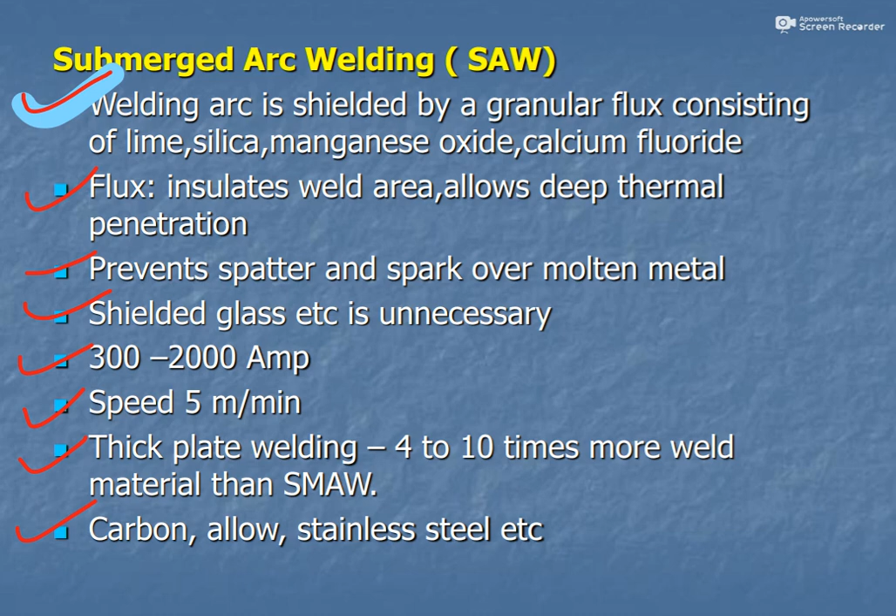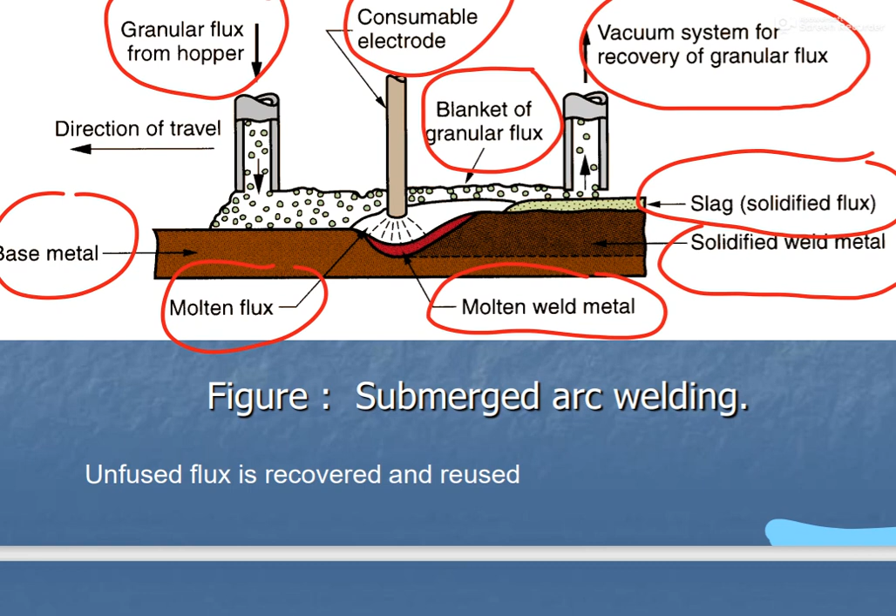Now, what is the construction of submerged arc welding process? First, granular flux coming from the hopper. This is the consumable electrode, blanket of granular flux, and then vacuum system for recovery of granular flux. This is the slag solidified flux, solidified weld metal, molten weld metal, molten flux, and base metal. This is the construction diagram of submerged arc welding process. You can take a snap of this image. Unfused flux is recovered and reused.

Now, what are the important equipments in submerged arc welding process? First is the voltage and current controller. Second is the unfused flux recovery tube. Third is the electrode wire reel. Fourth is the flux hopper. Fifth is the wire feed motor, contact tube, workpiece, weld backing, electrode, cable, ground, voltage pickup leads.

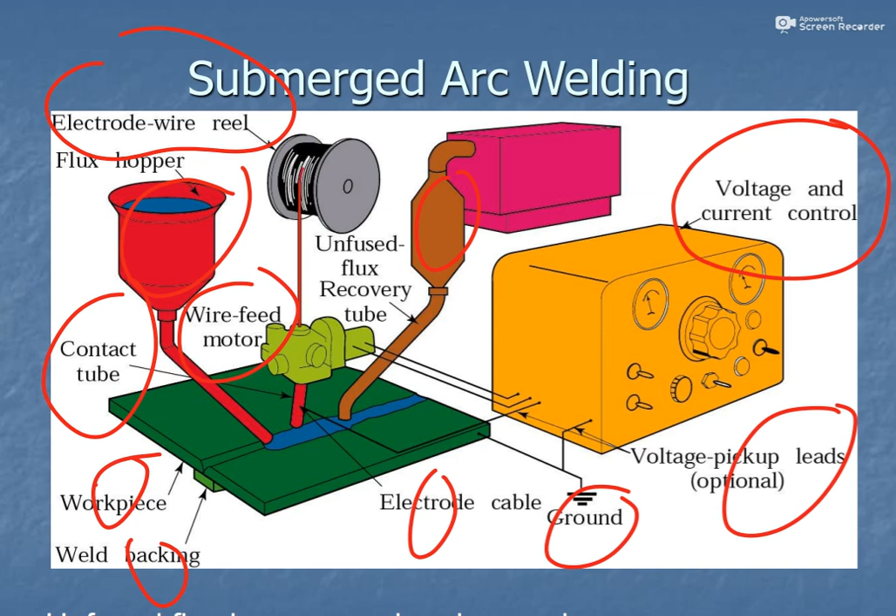Now, this is also the construction image of submerged arc welding process. This is the diagram of submerged arc welding process, a simple and easy diagram you can draw while answering the question. This is the workpiece. This is the earth provided to the workpiece. Weld pool is created during welding. Submerged arc, electrode wire, drive rolls through which the electrode is fed, and DC power supply, fused covering flux. You can take the snap of this image.

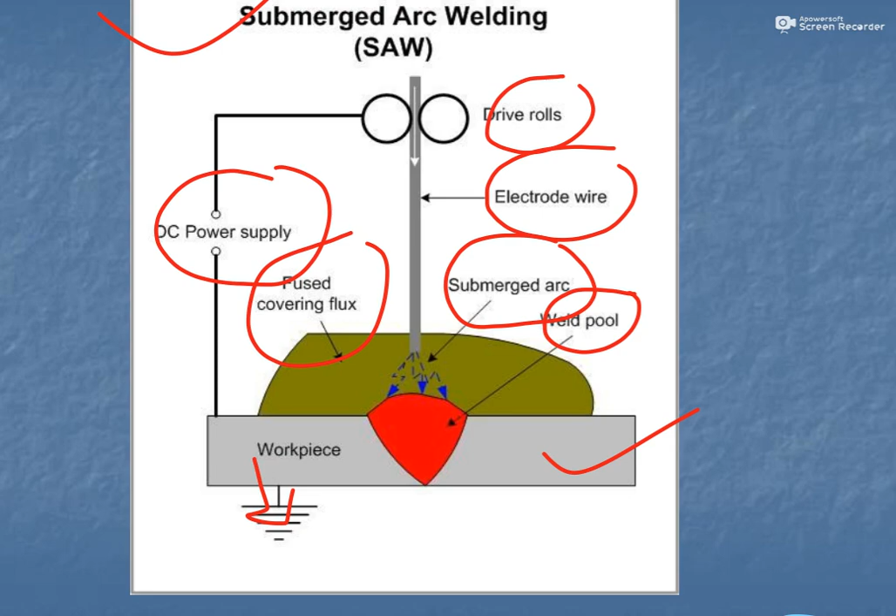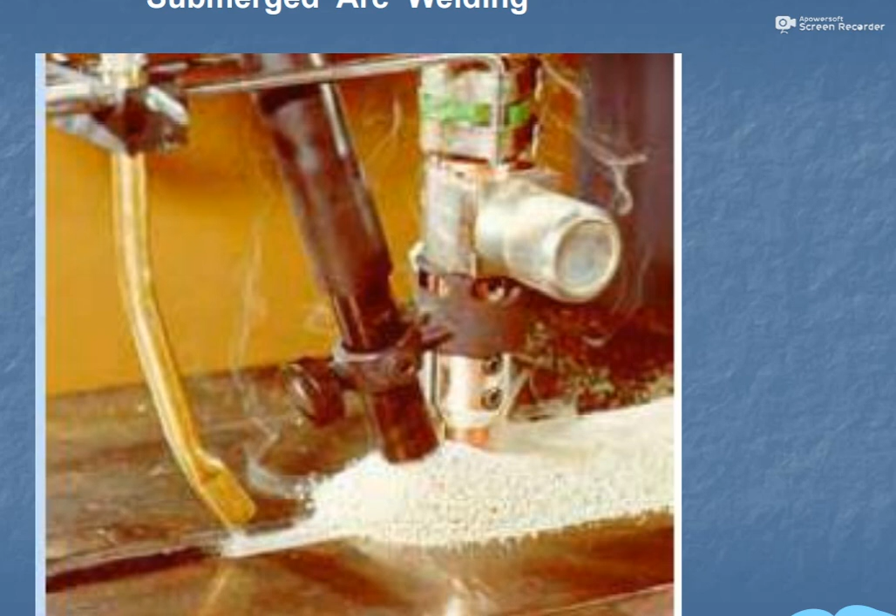Now, this is the working image of the submerged arc welding process. Practically, we can observe this image when we perform the practicals. Now, what are the processes involved in submerged arc welding and its working principle? These are the 4 processes. First, the flux containing calcium oxide, calcium fluoride, silica is crushed to form a coarse, granulated flux powder. This powder is then spread over the point where the weld is to be formed.

Second, the consumable electrode is fed into this flux. Since the electrode is submerged into the flux, the arc is invisible. Third, when power supply is on, an arc is formed, which is submerged under the layer of powder. The intense heat of the arc produces a pool of molten metal in the joint. At this time, a portion of flux melts which protects the liquid weld pool from surroundings, whereas the rest of the flux which has not melted shields the arc from the surroundings.

Fourth, this molten flux acts as a cleaner, absorbing impurities from the molten metal and producing slag, which floats on the top of the molten metal. This slag solidifies with the molten metal and can be easily brushed off. This is the process involved in submerged arc welding. You can write it as it is.

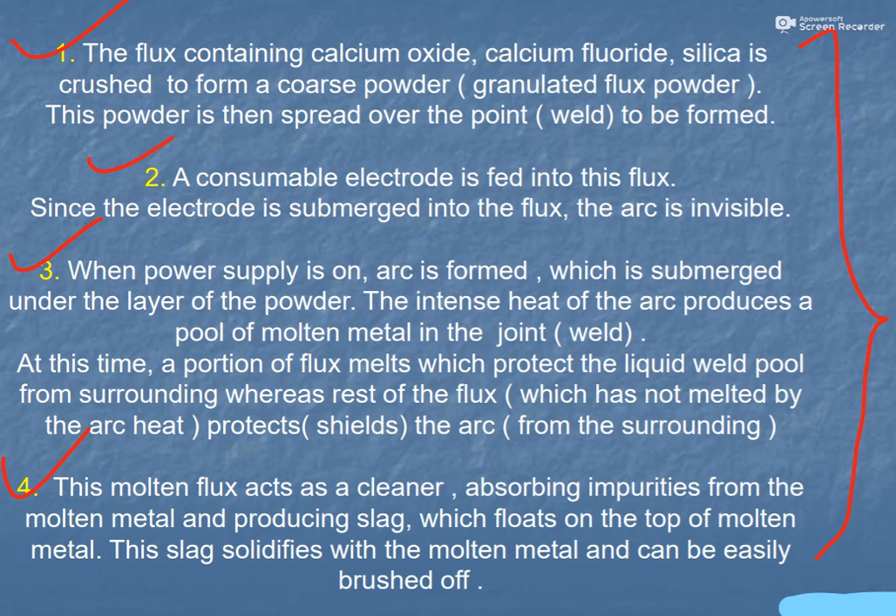Now, what are the advantages and disadvantages of submerged arc welding? Advantages: very high welding rate. The process is suitable for automation. High quality weld structure. Disadvantages: weld may contain slag inclusions. Limited application of the process, mostly for welding horizontally located plates.

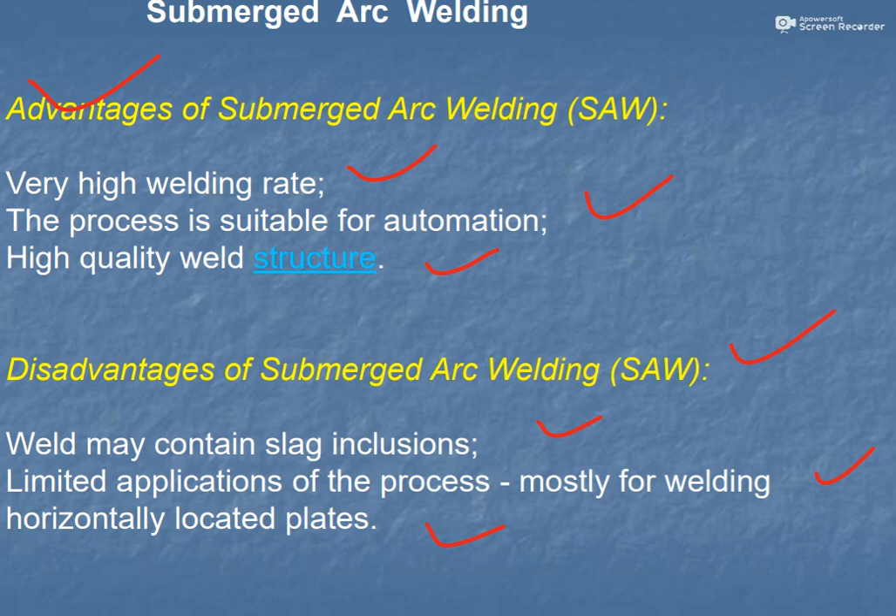Now, what are the applications of submerged arc welding process? Steel fabrication of structural shapes, I-beams. I-beams are created by this process. Seams for large diameter pipes, tanks and pressure vessels. Welded components for heavy machineries. Most steels except high carbon steels. Not good for non-ferrous metals. These are the applications of submerged arc welding process. So we have successfully completed the topic submerged arc welding.